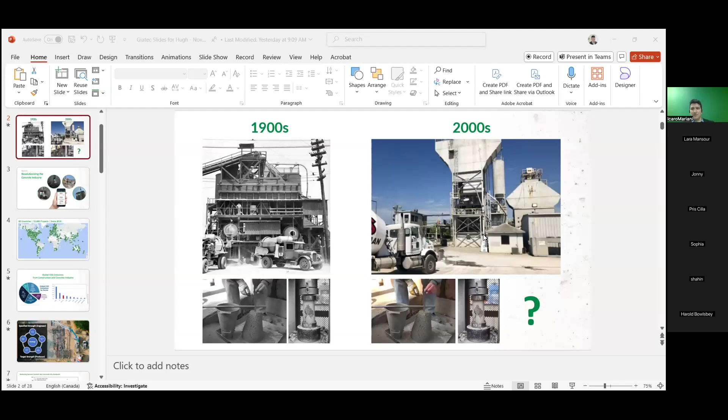Got it. So why don't we switch gears over to your slides? So Icaro is going to walk us through some things that are a little bit more specific to the question. So if you don't mind sharing. 100%. Just give me one second to presenter mode. You should see that coming up in a second. Okay. Do you see my presentation? Yep, that works. We'll pop it into presenter mode. I think it's still, yeah, there we go. Presenter mode, right. Looks like we're going to go back in time to where it all began.

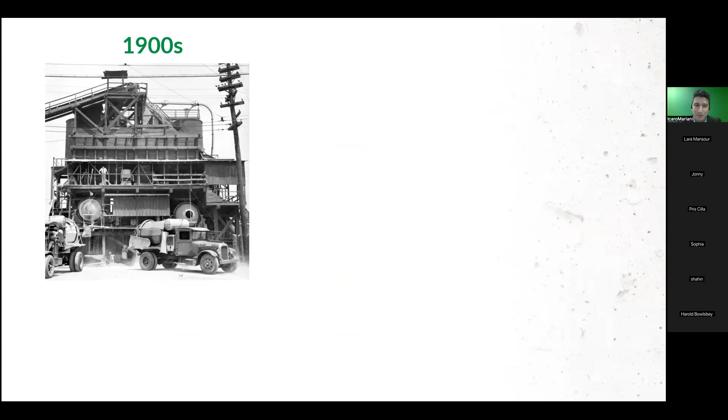Yeah, so I'd like to start here by showing a picture of a concrete batch plant back in the 1900s. And what we see here is the fancy trucks that we had back then and the concrete being mixed similarly to the way we're doing things now. So in 100 years, the process of mixing concrete hasn't changed a lot. Of course, we have new technology in batching systems and how to integrate different systems into the cloud. But the way we produce concrete itself, the core of it, hasn't changed.

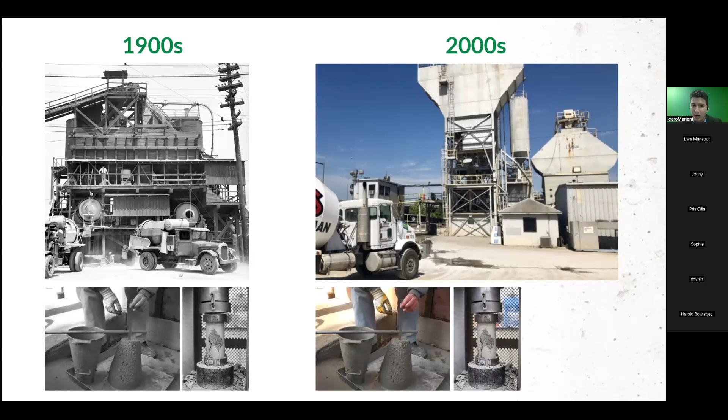And the way we analyze the data we get out of it is still the same. The slump tests and breaking samples, basically, they're still the same. The only difference we see now is, of course, we have better grading of the aggregates. So instead of using the traditional 6x12, we use the 4x8 cylinders, but the process of measuring the quality of concrete hasn't changed in like 100 years. And one of the goals we have here at Giatec is to actually reshape the way we do things and enhance the industry.

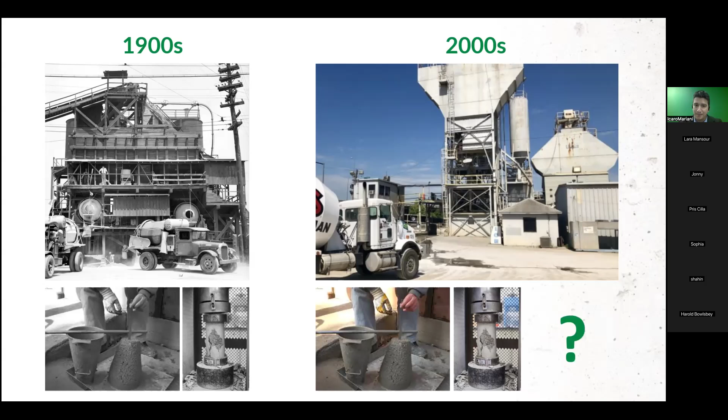And that leads me to the second slide, which is: what is the goal of introducing IoT and AI in the construction industry? So we can actually integrate everything from batching the concrete at the batch plant, putting it at the job site, monitoring it after the placement, and actually having the go-ahead to perform critical operations when the time comes, such as stressing cables in post-tension decks or removing forms on high-rise buildings. Does that make sense? Yeah, it does.

So what you're saying is you guys are really looking at the life cycle from when it's designed to mixed to put in place to curing to finally you walk away from it. Exactly. So the goal is to have a fully integrated system where the GC, the CMTs, the EORs, everyone has visibility of the cycle of that concrete, coming directly from the concrete batch plant, also in transit, and then when you're pouring that concrete.

So one of the things this obviously brings up is we talk about AI a lot as if it's a binary, there is this or there isn't that. And a lot of what I find is what sometimes people label as AI is sometimes just pretty good statistics.

And it feels like what you're laying the groundwork for, I might use the word foundation yet again, is not just AI, but a range of methods to better understand what's going on. Not everything needs AI. Sometimes just good statistics or good analytics is enough.

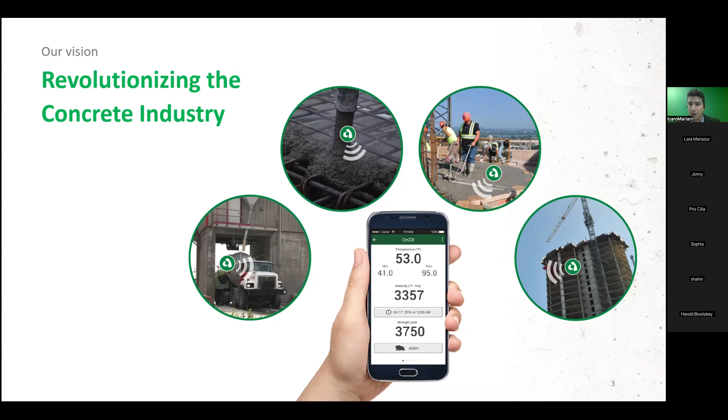Very cool. Imagine that you have different mix designs, and then if you have a patchwork in a viaduct where you're gaining strength in 3 or 4 hours, knowing that start time is actually very beneficial. So the data analytics and the machine learning that came out of the thousands of data points we acquired in the past years actually helped us succeed on that front. Love it.

In this one, I would like to mention the global CO2 emissions to give a perspective of another front we're trying to tackle here at Giatec, which is how can we make the world a better place? And with all the new changes in carbon reduction across different states and different countries, I'd like to bring awareness of what if concrete was a country? If concrete alone, including cement, I would say, we would be the third most polluting country in the world, just behind China and the United States.

So any cement we can take out of our mixes, any enhancements we can make into our mixes in our processes, we're going to greatly reduce that emissions that are coming from the concrete industry. So not everyone knows about this, but concrete would be the third most polluting country in the world. Well, if I may, that just sets the stage for why a lot of this is important. Is that in addition to just knowing how quickly things are happening and being on top of the progress, understanding what your concrete is doing is enormous.

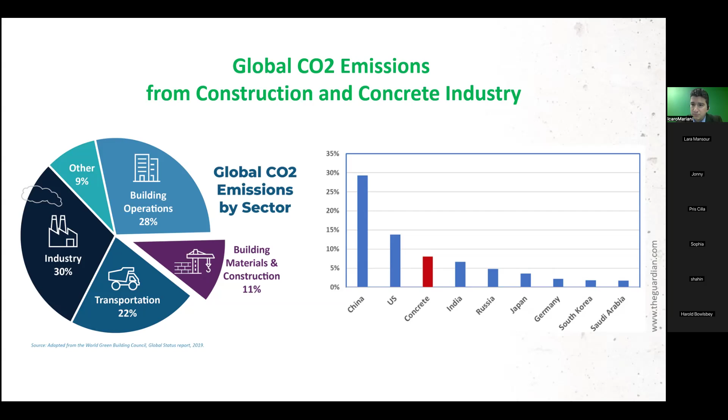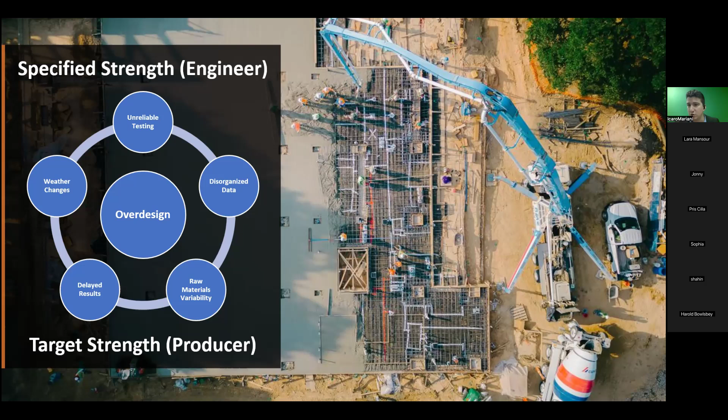And I think you're about to get into the other reason this is so important, right? 100%. And that is just going to be a teaser for our next session. But I would just like to mention what leads to that excessive carbon emission. A lot of it comes from the over design because sometimes you have unreliable testing, you don't have enough data that is properly organized, raw materials variability. Let's say instead of using VSI crushers, you're using jaw crushers only, or delayed results or weather changes. So a lot in this cycle leads to an over design, both from the concrete producer perspective, but also from a structural engineer design. Because on the other side, you also need your safety factors, right? And everything piles up to have an over designed mix.

And our goal is to actually use machine learning processes and AI to, okay, we have a strong data set here from different mixes. And then we can actually pinpoint how much those mixes are being over designed and propose optimization methods based on packing models, based on cement efficiency, and other factors.

So if I can just pull this out one more time, what's really important about what you're saying here with the over design, and you see it throughout construction, is that these are buildings that can't fall down. So if we know that we have imprecise data, you add in padding and you put in more than you need. Analogy I made when we were first talking about this, there's a company called QNect, and they do connection engineering, which is for the steel superstructure. And before them, there were really only a couple of ways to do the connection design, and they overdid it because they didn't have the ability to.

Well, two things. One is they assumed the fabrication of the steel had a pretty wide range, which used to be true and isn't anymore. Certainly not like it was, but also they didn't have the staff to do the design, joint by joint. Well, now you can automate that, and they save tons and tons and literally millions of dollars in steel because they can do a better job and they don't have to over design. Seeing that in concrete, which is of course an enormous component for most buildings, is a really big deal.

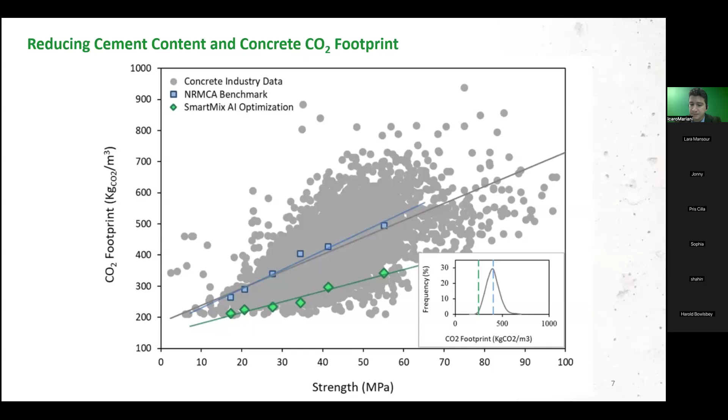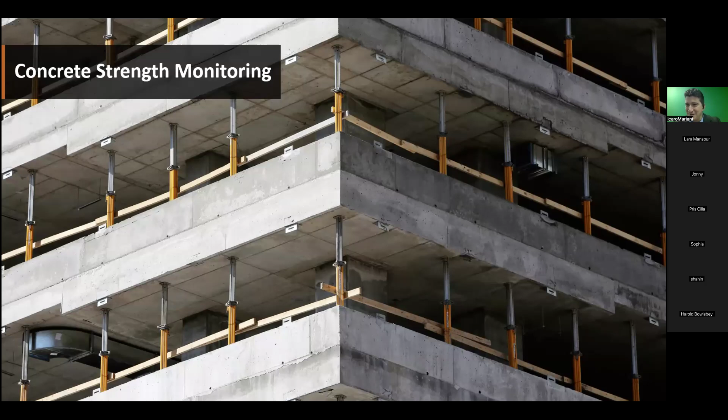And here, just an example, like a 30% CO2 reduction in this example. But that was basically a teaser for what is coming up. We're going to dive into more in the future session, but talking about the actual strength in the job site, how we can actually do that.

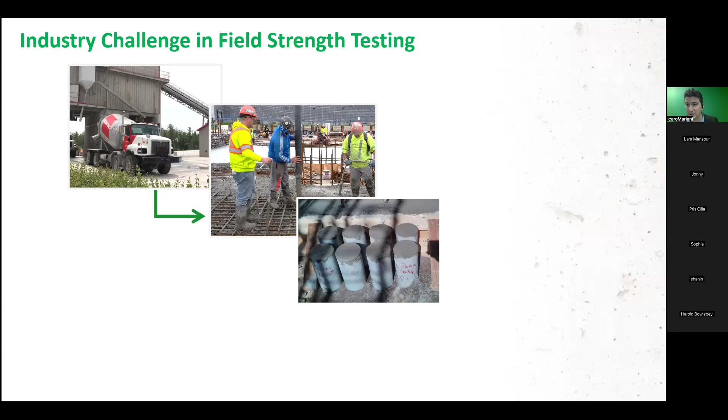The process is basically this. You have the concrete batch plant, and then you move it to the job site, you transport it, then you put it. And what you need to do is cast the samples to validate that the concrete that was received is indeed what was requested, right? And then you break those field specimens in the lab later on, because those samples stay at the job site for 24 to 48 hours in a cure box, they're transported to the lab, and then the lab breaks those samples, calls the project, and lets them know, okay, you're good to go. Remove your forms, stress your cables, move on.

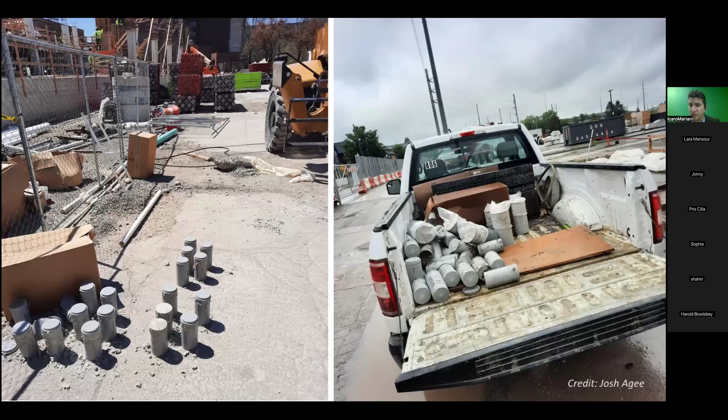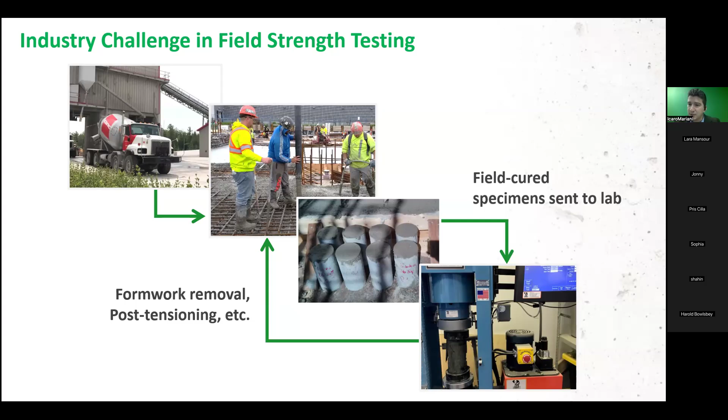But this process can be delayed. And the whole goal of using sensors is actually to prevent this from happening. So you can have a direct correlation on the job site, triggering alerts to all users, letting them know, hey, you're safe to go. You can remove your forms. You can optimize your team's efficiency. That makes sense. Very much.

And just an example here of the variability you get out of samples. I'm not saying this is throughout, okay? But images like this can happen. Otherwise, those pictures wouldn't exist, right? So we have samples being stored in the high heat of Texas on the left-hand side during summer, or just being dumped on a truck to be transported.

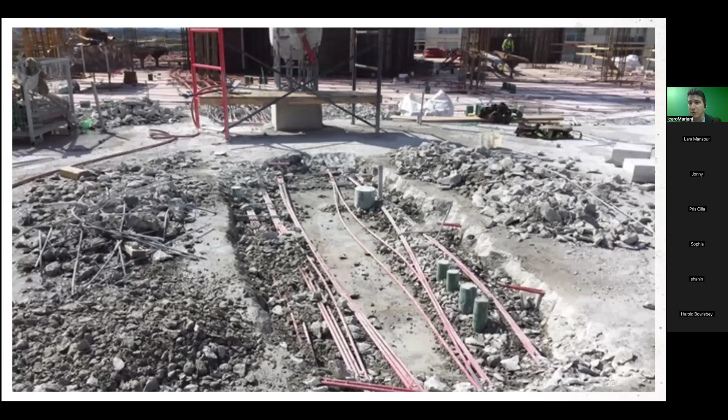And having this type of care with the samples can lead to huge mistakes, such as a blowout in a PT deck. So when you have a blowout, that picture is very impactful, in my opinion, because it can actually harm and even kill people. If you don't have enough strength, and then you're stressing your cables, anyone close to this can get harmed. So another facet to what we're trying to do here is actually bring more safety to the job site processes as well. So you can avoid things like this from happening. Does that make sense? Yep, very much.

Cool, cool. So I would just like to bring that parallel to what we're doing on the AI side. What we do in terms of concrete strength estimation with our IoT sensors is actually backed by different codes. Okay, so ACI 318, 228, 301, even 207 for mass concrete, they refer to the maturity method. ASTM as well, so the American standard, I would say, is the backbone standard for maturity across the globe. A lot of different codes reference and point to ASTM, including the Canadian one. CSA points to ASTM in terms of the maturity method.

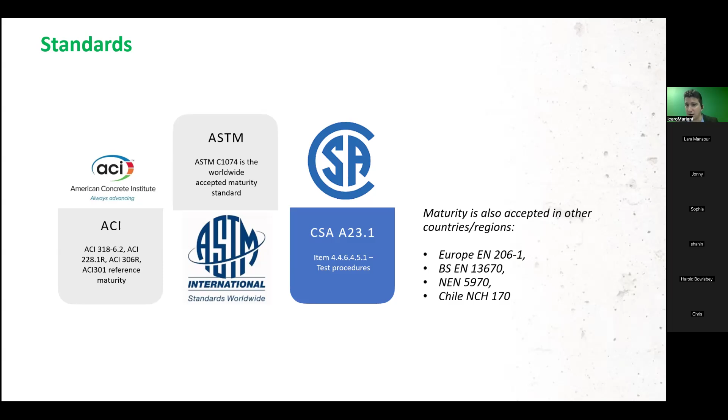And also different Euro codes, the Dutch code, 5970. So we have this process of maturity being widely accepted throughout the globe. And that is allowing us to use more data to kind of grow our AI side of things. If that makes sense. Yep.

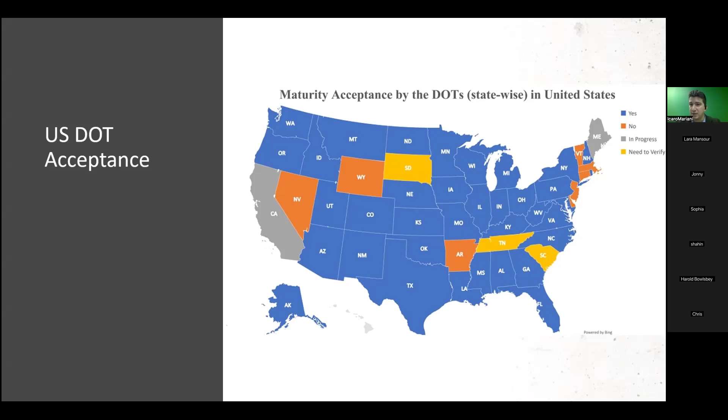Here is just an example of maturity acceptance by DOTs. So if you see, a lot of the states are accepting the maturity method. Some of them are in progress of accepting it. And some of them are not quite there yet. So what we're seeing is that the majority of DOTs across America are accepting the maturity method as a means of calculating your strength.

I don't want to dive into the details here, Hugh, but basically the process of estimating this is having an area under the curve. So the assumption of calculating strength is if your area under your temperature profile is the same for any given mix, it means that you have the same strength. The biggest advantage here is that on your left-hand side, your structure on site is generating a peak temperature because it has a mass effect compared to a cylinder that has this process spaced out. What happens is that you gain strength much more rapidly at the job site compared to a sample that is being cured in lab conditions. That's why you can move faster installing sensors on site.

Let's unpack that a little bit. If you can go back. So I just want to make sure we're unpacking this. So what you're saying is the difference between the time it takes in a laboratory environment versus on site can often be significant. That it's slower in a lab because of the form factor they're using versus a site where there's a lot more surface area. Presumably, the point is it absorbs the temperature more easily. Is that right? Is that the form factor of a real on-site pour, it gives it a lot more? So I would assume it's surface area, or is that not what's going on?

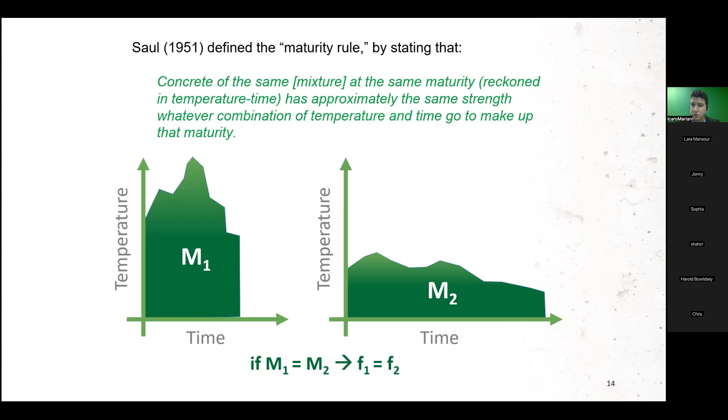Yeah, I've heard people say the warmest place in Calgary in the winter is where they're pouring concrete. Yeah, yeah. In Calgary during winter, we can go to -40. So that is tough. And I say -40 because -40 is the same for Celsius and Fahrenheit. Oh, that's funny. There you go. So it's bad for both sides. So the lines converge.

Yeah. But here is an example of what we're doing. So the sensors can actually capture your temperature, right? And convert that to a strength based on the maturity method. So even though you're using the same mix, here we have three different curves. This is Chicago, by the way. That was, I believe, October last year, if I'm not mistaken.

So what happens is your black line, which is your element, is peaking at 100 degrees and then slowly coming down to reach thermal stability. Your red line is your field specimen that was poured from the same truck, left on site overnight, and left on site throughout. And then the blue line is your lab one, which was left on site only for the first day and then moved to the lab.

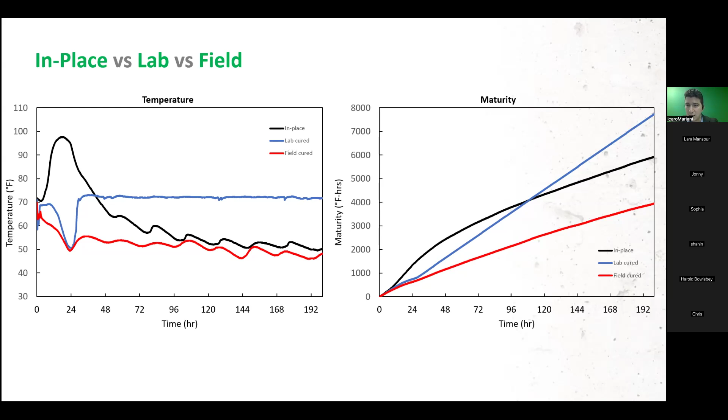So you see that despite being the same mix with the exact same proportions, the behavior is not going to be the same. And what we see out of this is a difference in the strength gain. If we compare our element versus our field, we're having 2.5 days to achieve 3,500 psi. 2.5 days. So that is huge. Sometimes you're just waiting for that result to come in while your structure is already there. It's already on point. You can move on. So the time savings you can get out of sensing devices can actually be measured through this type of analysis.

And just to reinforce a point you made earlier, in something like 47 U.S. states, this is something that an inspector would accept for an inspection. This matches what you were saying DOT will accept, but as opposed to what may or may not be in the spec, it is acceptable for a lot of AHJs, correct? 100%, yeah. ASTM C1074 is the standard.

So if you're outside a DOT project, let's say it's just a high rise, and you are in the United States, yes, it is accepted. That's great. It's just the DOT acceptance, because they follow AASHTO standards, right? So that's why it's a little bit different, but the concept is the same. So 47 states accept the maturity method for DOT projects. Ah, got it. And MTO as well here in Canada. Our difference is that it's not federal, it's like a provincial, but we follow ASTM as well.

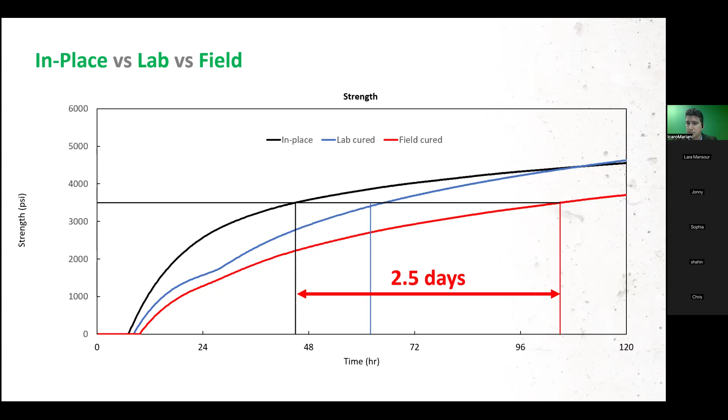In terms of applications, where can we use this? Literally in a lot of places. Mass concrete, opening traffic, post tensioning, formwork removal, even saw cutting. When you want to cut to provide your construction joints, you need to pinpoint, okay, I have 500 psi there. You can actually use sensors to pinpoint that for you.

Precast, even shotcrete. To be honest, we used the sensors at the Rondout project in New York. Over 1,000 sensors were used for shotcrete only. So I know it depends on the nozzle person, but as long as the sensors are properly installed, you can actually measure the strength of your element in shotcrete as well.

And back to the AI application of this is this point that across all of these different applications, form factors, and environments, your model is able to recognize and kick off the maturity calculation, right? I mean, that's the magic here. It isn't just that there's a sensor; it's that the data is being fed into a model that can identify when things have started and then when they've likely ended.

Yes, and more than that, Hugh. When you create what we call a maturity calibration, because for the sensors to work, you need to calibrate the mix design. You create the maturity calibration by casting samples, breaking them, and actually measuring the strength. So when we create this, we can actually feed the system with the mix proportions. So let's say you have 500 pounds of cement type 1, 200 pounds of fly ash type C, whatever. You can actually pinpoint all your mix proportions.

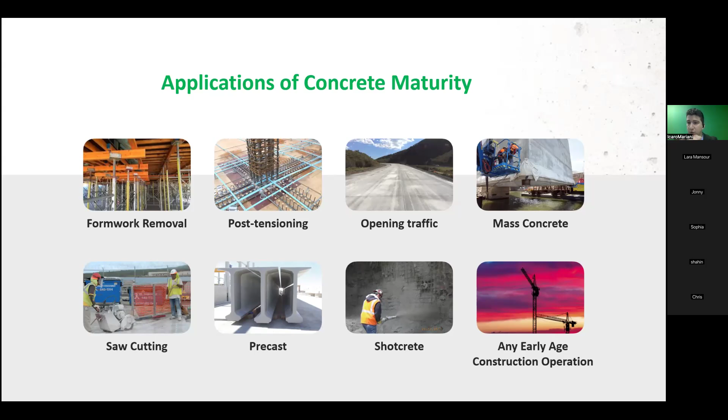Got it. That's great. And the sensor, I don't know if you can see my camera, looks like this, as I have on the palm of my hand. It's super simple, very intuitive. You have a QR code where you're going to tag, use the app, you turn it on by removing the probe from inside. It flashes 3 times and you're ready to rock. You just need to install this onto your rebar, no more than 2 inches, pour the concrete on top, and start measuring your strength and temperature. It's as easy as that.

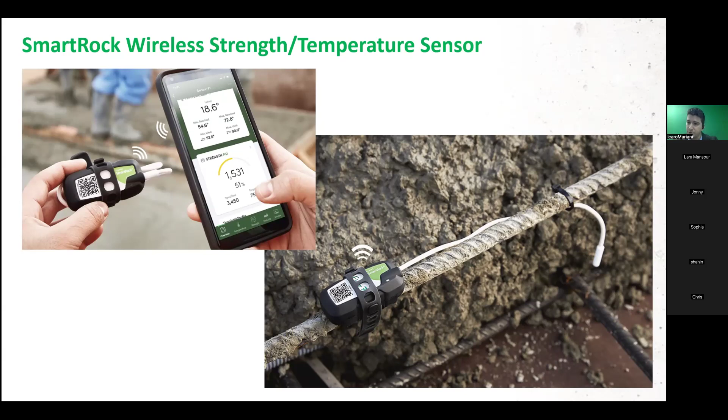Very cool. And the data analytics you're going to get out of it is your strength, your temperature, your target. Okay, I'm at 51%, I'm missing 49 to reach my target, basically. It shows you a progress bar. But more than that, it triggers push notifications to you and other team members that you select to let them know, okay, I reached my target, let's move on. Does that make sense? It does.

How deep into the concrete can it go? Because what I'm getting is you buy all the sensors and they're effectively consumable. You don't ever get them back. How deep in the concrete can it go and have the radio signal still come out? So it depends on what you need. The beauty of the sensors is that they are dual. You're taking a measurement at the tip of this probe and inside this logger.

So this logger must be no more than 2 inches from the surface, because you need the signal. But then this cable you can extend up to 100 feet, depending on how long your element is. It comes in different lengths. Got it, that makes sense. Right, you solve the radio problem by having the transmitter close to the surface, but the sensor can be anywhere you want it to be.

100%, yes. Yeah, that makes sense. The good thing is that it operates via Bluetooth and also LoRa. So if you are using LoRa technology, your smart hub can connect to the sensors up to 1,000 feet. So if you have a high-rise building, 40 floors or 50 floors high, you can just put a modem on your trailer and it's going to capture your entire job site, one modem. That is the beauty of it.

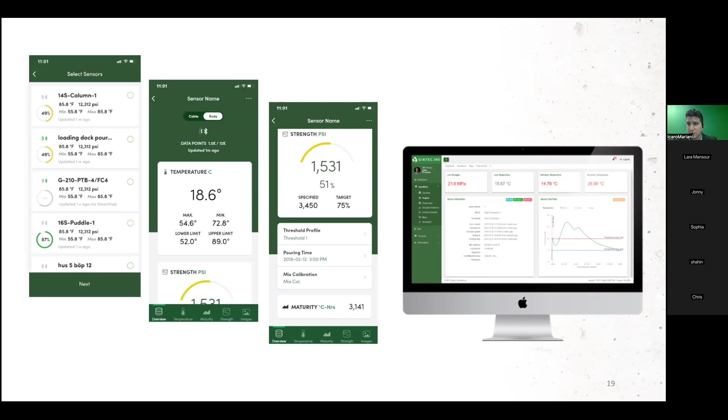Very cool. And as we mentioned, it can be used in different projects, like in tunnels, bridges, patchwork. Wind farms is a big one. So renewable energy across the United States recently, I would say the past 3 years, I cannot precise a percentage, but a lot of sensors were used in different wind farms. A lot. And in Texas, by the way. Why wind farms versus something else? What is it about wind farms? Is it just that they're conscious of their environmental impact, or

Both. So they're being conscious about the environmental impact, so they can actually check how the mix is performing, so they can present the producers with opportunities to enhance the mix. But more than that, following ACI 207, they need to respect temperature differentials. Because the sensor measures body and cable, you can calculate the difference of temperature between one and the other. And what happens is, and that is in my next slide coming up, Hugh, yep, if your temperature difference is too high, you're going to have cracks on your concrete. So you need to respect a 35, 40, 45, depending on the spec, limit to prevent thermal cracking. And that's why the sensors are being used, because the pedestals are huge. So they need to put a sensor in every single pedestal to track these differences.

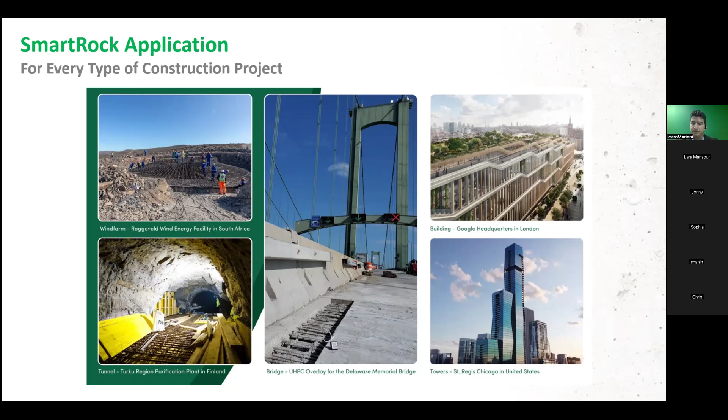Another thing that we have on our plate here, and I'm pretty proud of it because I believe this is a breakthrough in technology, is the SmartRock Pro. So this is the SmartRock Pro in my hand. You have two main components here, but basically it doesn't need a calibration. So it's a self-calibrating sensor. It's mix independent. So if your driver is adding water to a mix design on site, or if anything is happening to that specific load that a temperature sensor wouldn't capture, this sensor can, because it's mix independent. It self-calibrates; it only activates when it's fully covered in concrete. So it's a step ahead in the game of concrete strength measurements.

Yeah, so I would say this is a game changer. We are in the early adopter phase right now. So only selected customers that applied some time ago to purchase the sensors are receiving them. But soon we're gonna have it roll out across North America. So yeah, it's gonna be a game changer, because eventually our goal is you don't need cylinders or samples anymore.

Wow. Okay. Does that make sense? We'll talk a little bit more about why you won't need samples or cylinders anymore, why this self-calibration versus the other sensors makes that difference. I can talk about it a little bit more then, Hugh.

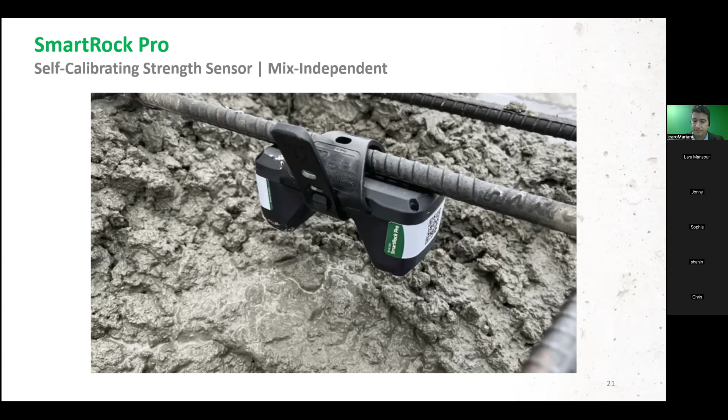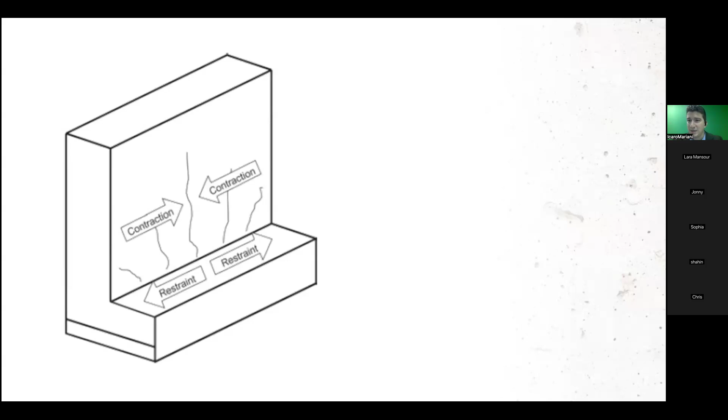Wow. Okay. And this is what we were discussing in the past, just explaining why thermal cracks occur. Basically, if your core is too hot, it's trying to expand, right? And then your surface is cooling down, it's trying to contract. And those tensions that are created by this expansion and contraction due to restraint can actually generate a thermal crack. And that's how maturity can help.

If you know that you have enough strength in your element, it means that you can boost your differential from 35 Fahrenheit or 20 degrees Celsius to 25 to 30, so on and so forth. As the sensors can measure your strength, they can actually tell you, okay, even though the temperature difference is very big, you are still safe because your concrete is strong enough to withstand the tensions it is being subjected to.

And is that why the second sensor has the two knobs, so it can sense what's going on physically? This sensor, yeah, the SmartRock 3s, they have the two, so you can actually measure two locations at once. The new one only measures one location so far. So we are in the initial stages. Let me show you. This one is the transmitter, the antenna that is going to go at the top, and the other one is where you're taking the measurement. Oh, I see. So this one only measures one location. Got it.

But is it measuring actual strength? Because you've got the two kind of knobs, is that why it's shaped that way, so you can actually sense strength and/or tension? Yes, you nailed it. That's it. Really interesting. Yeah, it's a new technology. It's patent pending, as I told you, but I joined Giatec 6 years ago and that product was in the works already. So it took a lot of work to bring this to the market, and this is going to be a game changer.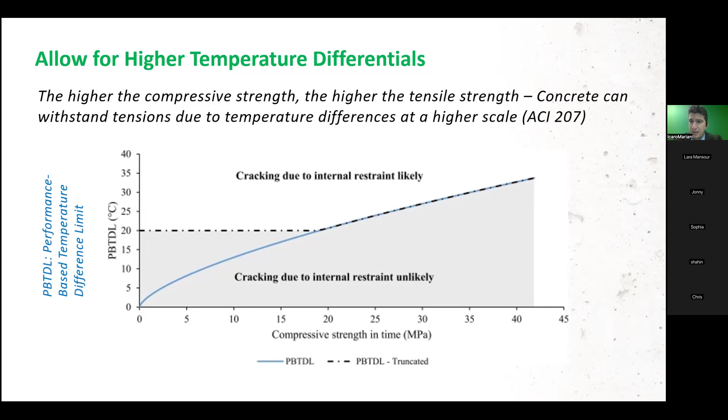100%. And just to close the loop here, talking about machine learning specifically, we have a feature in our cloud, because all the information from the sensors goes to a cloud dashboard where you can see the data, print reports, and manage your data, right? We have this system where, okay, I have a project in Austin starting on Monday. So you can pinpoint the location. You can mimic your element dimensions.

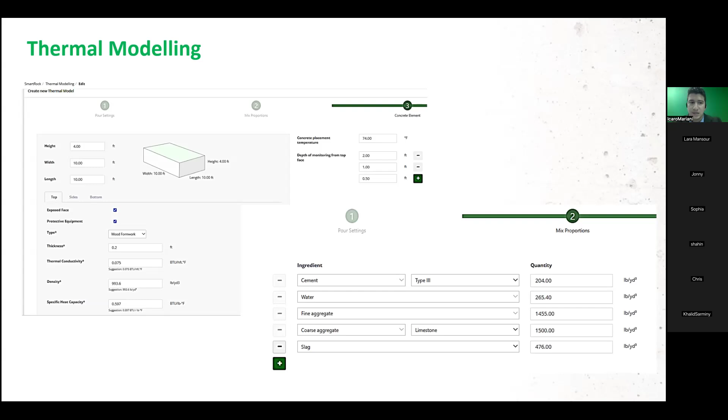You're going to put in the protective equipment that you're going to use. Let's say you have wood forms on the side, blankets on top, you can actually build that model. Enter your mix proportions, as you see here at the bottom: the type of cement, how much water, fine aggregate, slag. And what the model is going to tell you is how your concrete is going to perform in the future based on your location.

So if the temperature is dropping a lot, you can take proactive measures such as purchasing blankets. Or if it's the height of summer, you can ask your producer to start adding ice to the mix, so you don't reach a super high peak, for example. So it allows you to mimic your element even before you pour your concrete.

Question, especially when it comes to the SmartRock Pro: how long do you continue to get data from it? Will it last for a year or two? Because one of the other interesting things that this opens up the possibility of is, you hear people talk about there's just not a lot of data about what's actually happening in buildings after things are installed, whether it's the trades or the GCs, they move on to the next job.

And a lot of the standards we have are based as much on experience as they are hard data. Because again, the people usually that are responsible aren't necessarily building operators. They're usually product and material installers, like the contractors who don't check 5 years later, right? So the fact that you knew that the Hoover Dam took a decade or so to cool is probably because some scientists wanted to go check that out.